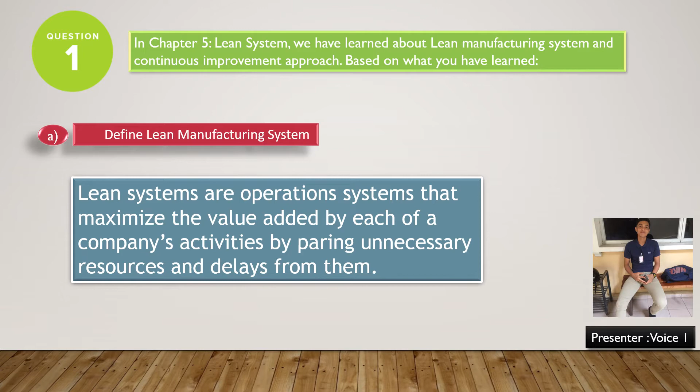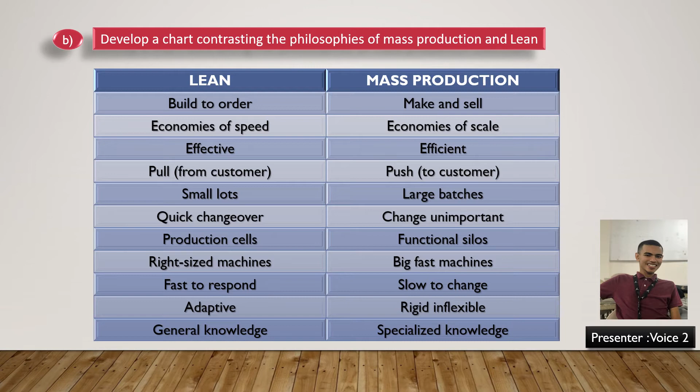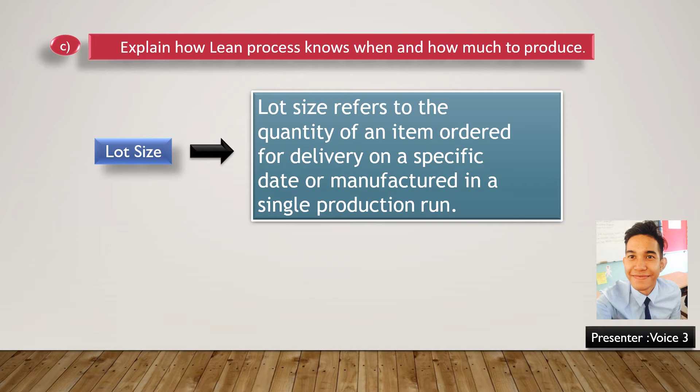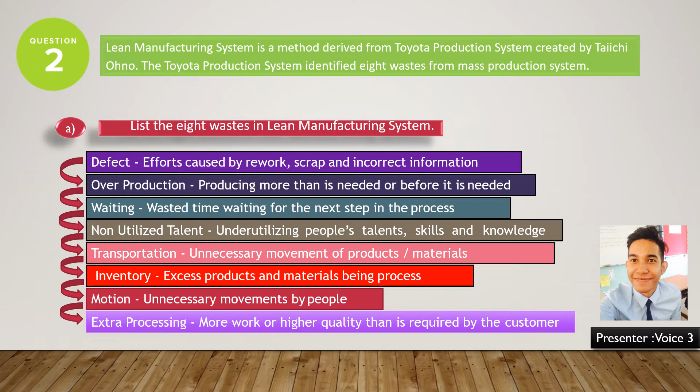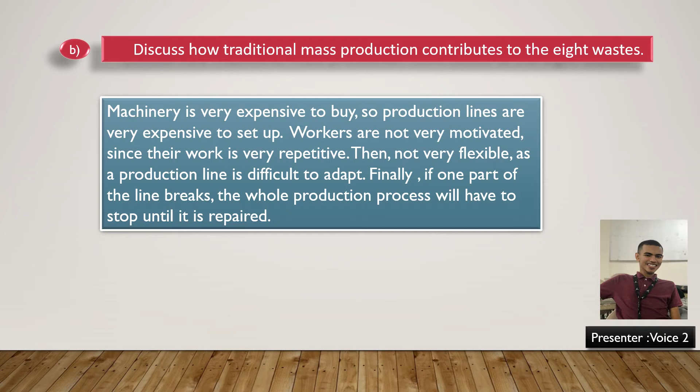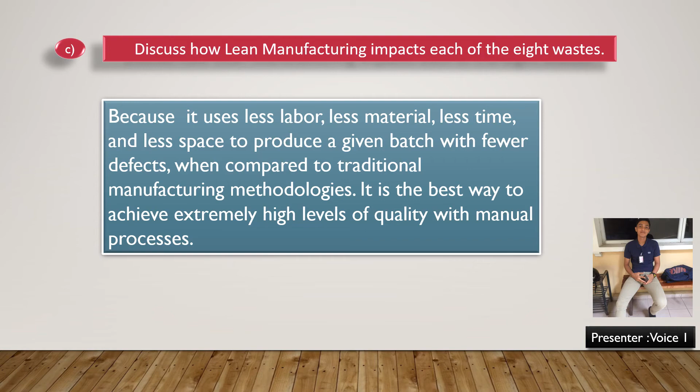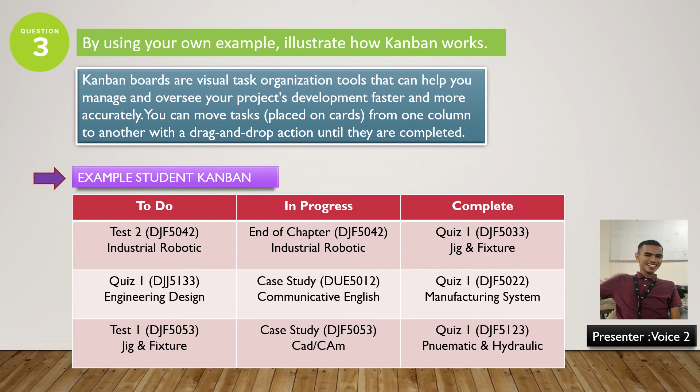And lastly, case study DJF5053 CAD-CAM. And what we have completed is quiz 1 DJF5033 Jig and Fixture. Secondly, quiz 1 DJF5022 Manufacturing System. And lastly, quiz 1 DJF5123 Pneumatic and Hydraulic. For question 4, based on the situation below, a cafe baked breads and pastries for the

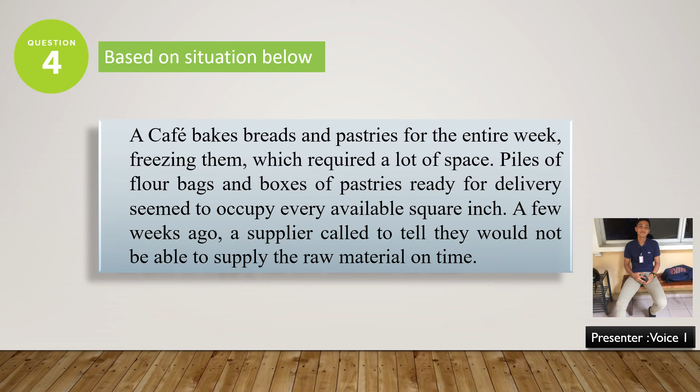entire week, freezing them, which required a lot of space. Piles of flour bags and boxes of pastries ready for delivery seem to occupy every available square inch. A few weeks ago, a supplier called to tell they would not be able to supply the raw material on time.

For question 4A, identify a lean approach with explanation on lessening the impact of waste. The answer is reduce waste caused by excess inventory and overproduction. In the lean manufacturing model, any inventory that is not directly required to fulfill a specific customer order is a potential waste. Compare existing inventory with sales data before production to decrease the volume of excess inventory.

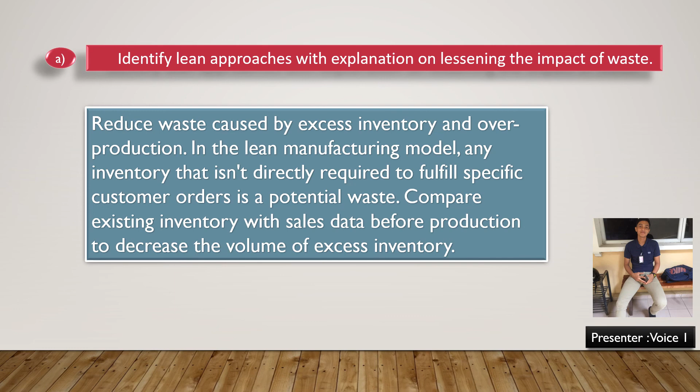Question 4B. List expected benefits from each approach applied in 4A. What we expect from 4A. Point 1. Reduce waste caused by excess inventory and overproduction. Point 2. Minimize labor expenditures related to unnecessary motion. Point 3. Decrease transportation related waste. Point 4. Reduce overprocessing waste.